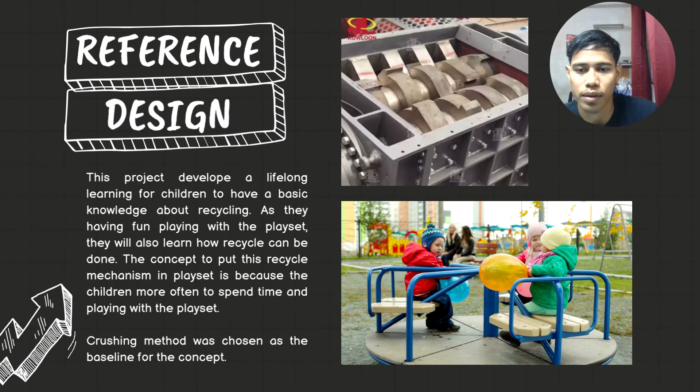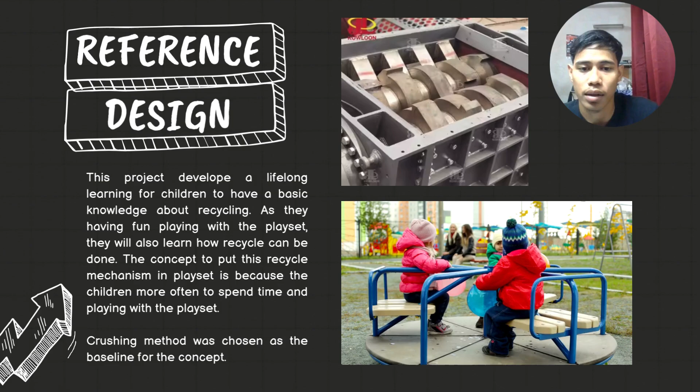This project is developed for lifelong learning for children to have basic knowledge about recycling. As they have fun playing with the playset, they will also learn how recycling can be done. The concept we put in this playset is a crushing method.

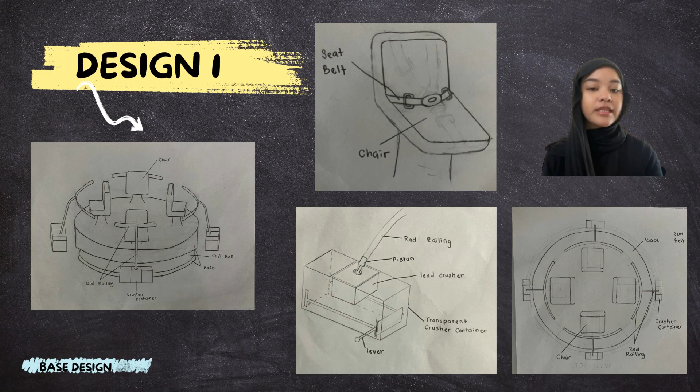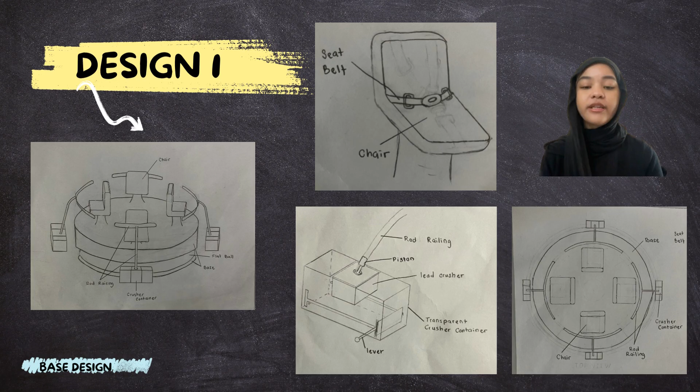The design was inspired by a Korean amusement ride. It works by balancing the kid's weight using a flat ball, which will sway like a boat. As you can see, the design came with a seatbelt on the chair for safety measurement for the kids. The material is also safe for children with skin problems such as eczema, as it uses composite material made of leaves for the seating and the handle. The point is to prevent children from touching rusted metal.

This second design was inspired by discussion between me and my team member. The design was inspired by a merry-go-round that we modified, using its movement but with a bicycle instead. The bicycle rear tire will be connected to the crusher container so that the bicycle will move in a circle around the crusher, while the crusher will also move stationary in a circle.

The pedal will be connected to the crusher. Therefore, as the kid is pedaling the bicycle, the crusher will also move along with it. The bicycle also has no bike chain to prevent injury, as a safety measurement for the kids. The material used for the design is composite material, polycarbonate and steel. Also, the cost to produce this design is very cheap and affordable.

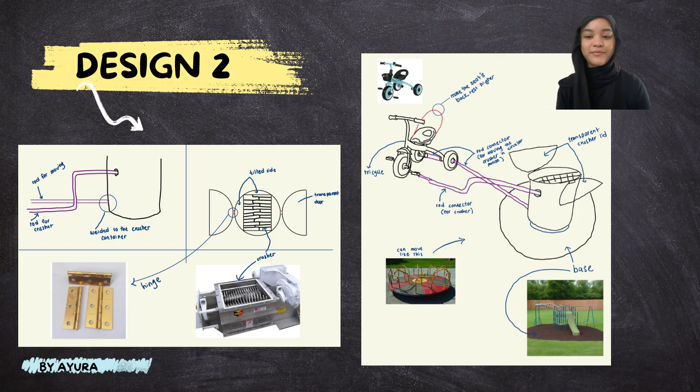Hi, my design is a combination of bike sharing and treading. According to existing research, human leg muscles are the most powerful. At the same time, the main moving component of the crusher is the spindle. I wondered if we could use the same force as a child pedaling a bicycle while playing to drive the crusher. The key to the design is how to transmit power.

I designed a gear train to convert the circular motion to the fixed axis rotation of the crusher spindle by means of an epicyclic gear. Considering that the child's strength may not be enough, we use a combination of pinion to big gear, and the lever theorem shows that the force on the pinion, that is the force provided by the child when pedaling, is relatively small, while the force transmitted to the spindle is relatively large, so that the garbage can be easily crushed. Combined with some interesting shape design, this can attract children's interest in playing.

This is my design sketch. This is my drawing from the top view.

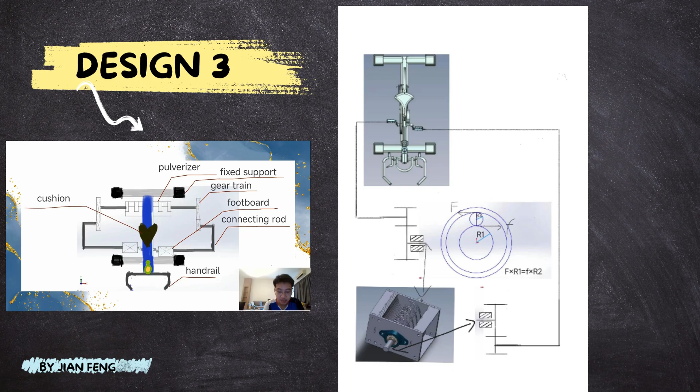The fourth design will be the kids recycling bike. In this concept, the bike will be stationary, and when kids start to pedal, it powers the attached recycling machine, so they can drop small recyclable items like bottle caps or plastic pieces into a slot at the top of the machine, which is the crusher, the grinder.

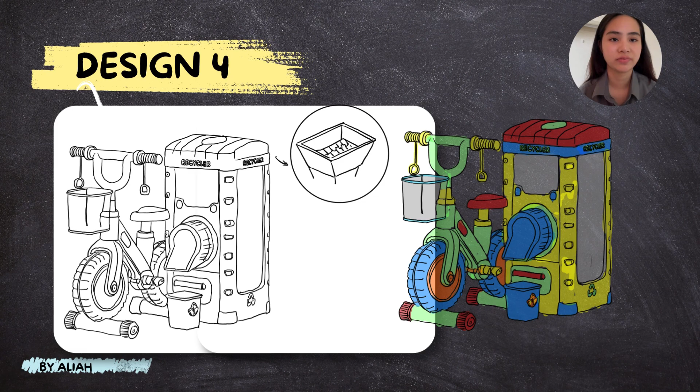Inside, the items get sorted and ground into small bits. The ground up bits then come out of a chute at the front, where they can be collected in a small recycling bin. So this setup not only encourages physical activity but also teaches kids the importance of recycling.

Now I will continue with my design. Basically, the recycler mechanism goes at the end of the spring rider leg. There is a compressor designed to crush cans as the rider rides it. When the rider moves forward and backward, the cans are compressed, making them easier for recycling facilities to process.

Other than that, there is also a support to ensure that the spring rider moves forward and backward only, because as we know, a spring rider can move freely according to the rider.

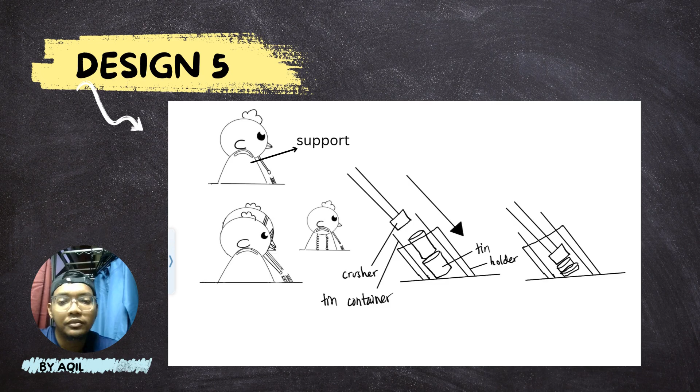I will brief shortly about this design. This is a seesaw with a crushing mechanism. When the seesaw moves up and down, it will turn the connecting rod, and the crusher will move forward and backward to crush waste.

To put waste into the container, the children will have to open the cover and also collect the waste after it finishes crushing.

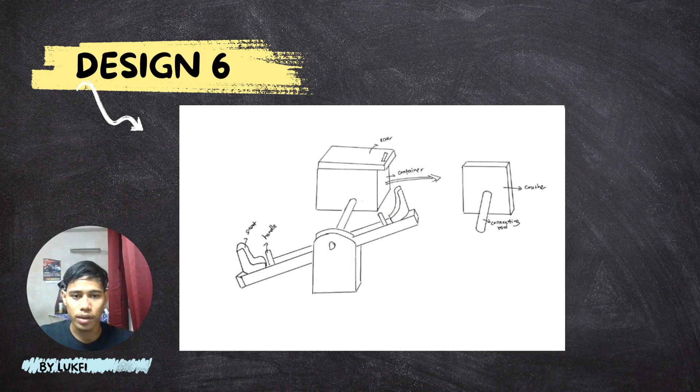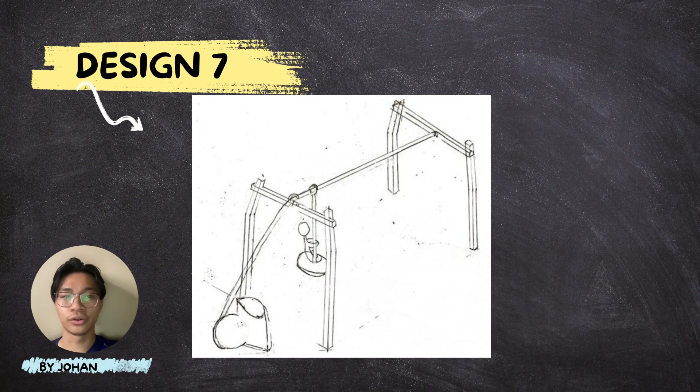The cable above will move alternately with the platform. This will produce kinetic energy due to their movement. This energy can be captured and converted into electrical energy using mechanical systems. Many systems utilize a dynamo or small generator connected to the moving parts of the playground equipment. For example, as a child slides down a zip line, their motion can turn a rotor inside the dynamo. The dynamo converts the kinetic energy from the movement into electrical energy through electromagnetic induction. This process involves rotating a coil within a magnetic field, which generates electricity.

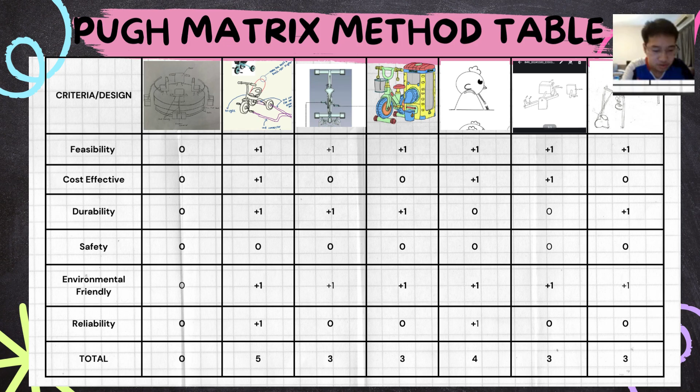From the point of view of environmental protection, all the designs involve resource recovery to some extent, so they are very environmentally friendly. The second and fifth designs have a large number of live examples for reference, so the reliability is better. Finally, in general, second, in addition to the security needing improvement, other aspects of performance are relatively good. So we choose this design as our final design.

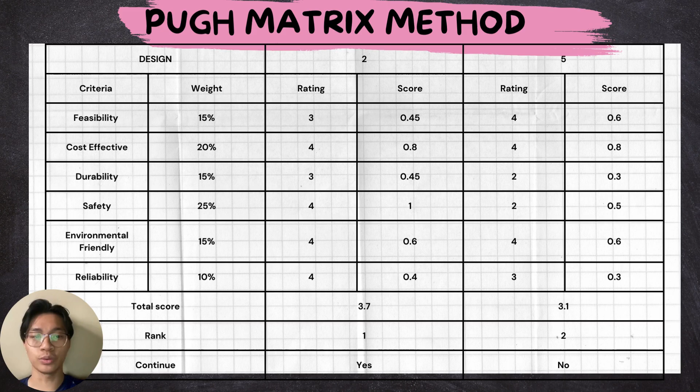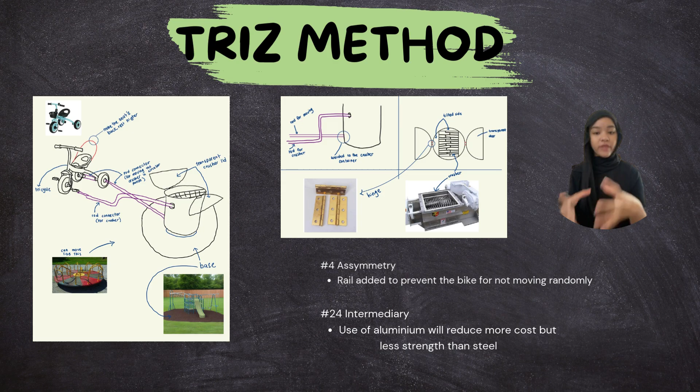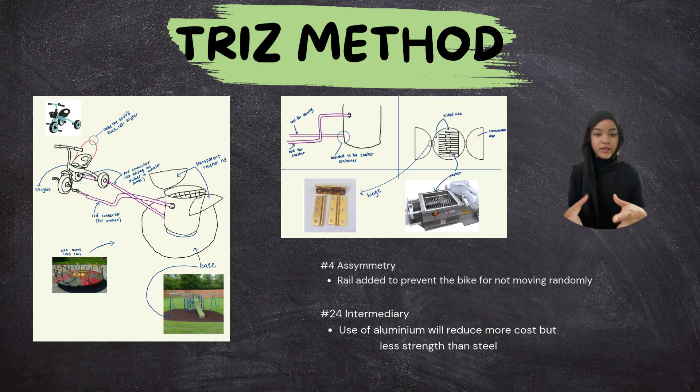TRIZ method is used to solve problems and innovate by providing a systematic approach to identify problems and generate solutions. There are 40 innovative ideas for the TRIZ method. The one we choose to improve in the product is the asymmetry, which we are going to improve by adding a rail as a pathway for the tire, to make sure the tire and handle are not moving randomly. Secondly, for intermediary, we decided to use aluminium instead of steel as it is a lot cheaper, but the strength comparison is the opposite.

After going through the Pugh method and TRIZ method, we have decided to choose the design as our final design selection.

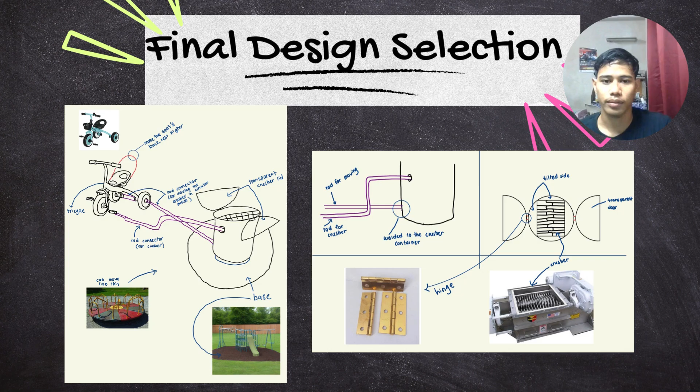Now I will continue with project design specification for final design. The main function is to use force from cycling to propel the crusher to recycle. The client or market requirement is sports safety and easy to operate. Next, performance requirement: the load capacity is for children with weight from 20 kilogram to 40 kilogram. Operational force required is at least 15 kilogram. Accuracy is medium, and durability of the design is 20 until 45 years.

Next, for physical and operational characteristics: the size is 4 meters in diameter, the weight is 30 kilogram. The material is composite material, aluminium, transparent, and polycarbonate. For ergonomics, the connection between bicycle and crusher ensures efficient crushing process. Next, environmental consideration: the operating temperature range is negative 20 degrees Celsius until 60 degrees Celsius, and the operating environment is outside weather. Lastly, for production and cost requirement, target production quantity is one for every playground in Malaysia, and the target cost for one design is 500 ringgit Malaysia.

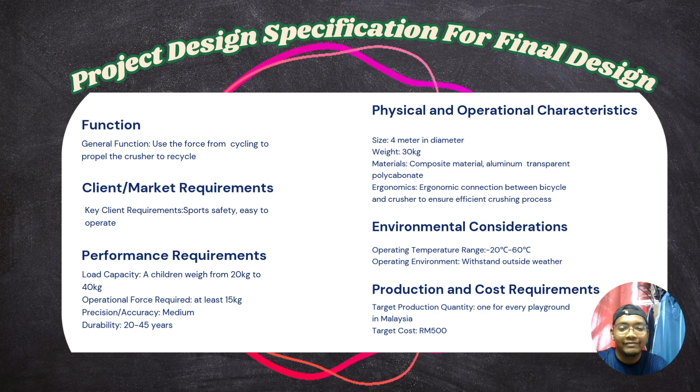Moving on to the next part is the safety requirements. We must put the seat belt to prevent accidents. For aesthetic and finish, the appearance must be attractive, the color is colorful, and the texture must be glossy so we can easily attract kids or children. For standards and regulation, we comply with ISO standards. For testing requirements, prototype testing and load testing, 40 kilogram and 500 cycles, which is suitable for children.

Next is market and competitor analysis. Target market is indoor and outdoor playground. For competitors, there is community engagement, because these systems encourage community involvement and education about renewable energy technologies. For documentation and training, there is a manual board for children to read to ensure proper use of this product, and also no training is required. For disposal and end of life, environmental impact shows less rust forming and recyclability, because all materials can be recycled depending on their condition. So what are the next steps?

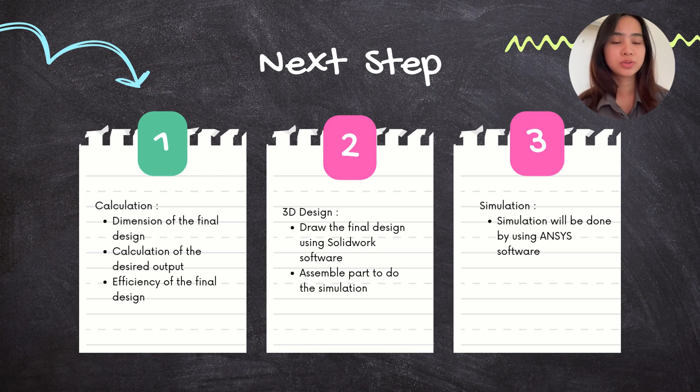The next step is the calculation, 3D design, and simulation. For the calculation, the dimension of the final design will be calculated, along with the calculation of the desired output and the efficiency of the final design. For the 3D design, we will draw the final design using SolidWorks software and assemble the parts to do the simulation of the design. The simulation will be done using ANSYS software.